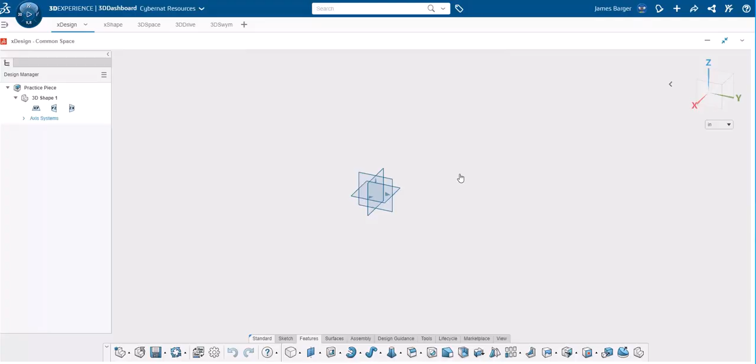So once I start xDesign, I want to go in and create a new design. Now I'm going to name it, let's just name it practice piece. And it's going to save it into my common space on the platform. All right, so now I'm in my new file, I want to do a top-down approach. So I'm going to click on Z-axis. I'm going to tell it to create a sketch. Now I'm ready to start designing.

So first thing I want to do is just go down to my sketch tools, and let's just draw a rectangle. Start at our origin. Draw any sized box. Now obviously I want to draw this so it's not going to take a lot of material, and it needs to fit on the table on my machine. So again, this is just for practice. So let's set our dimensions. Let's make it 12 inches long.

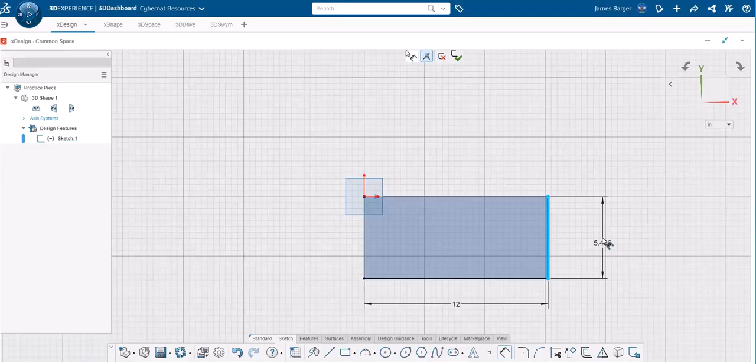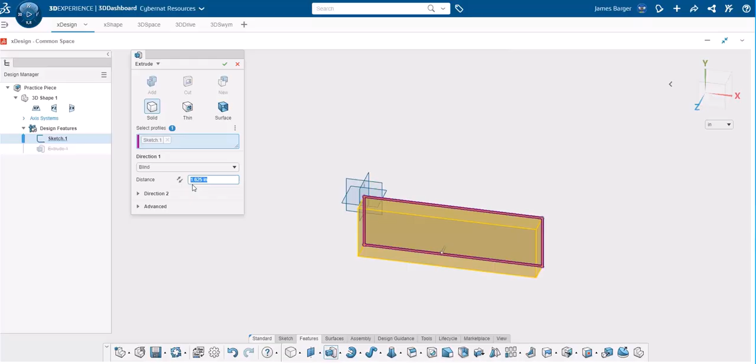And we're using a 2x4. So a 2x4 is not actually 2 inches by 4 inches. The 4 inches is actually 3 5/8. So let's set that width, and then let's go down to features. And let's extrude this. And just like 4 inches isn't 4 inches, 2 inches isn't 2 inches. It's 1 and 5/8 inches. So we'll set our depth on our extrude at 1.625. Extrude it, and there's our solid block.

Wow, we drew a 2x4 inside of xDesign. Isn't that amazing? And for this project, it'll work. But I just don't want it to cut a 2x4. I wanted to do some other things too to make sure that all my settings inside of my software on my CNC are correct and that the machine is cutting correctly and accurately.

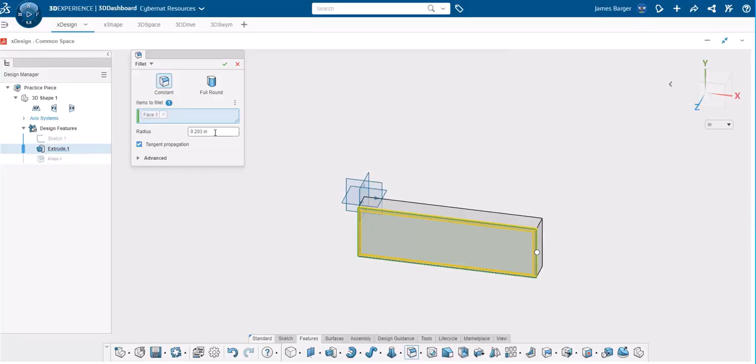So let's go down into features on the tools, and let's put a fillet on our piece of wood. And when we hit fillet, it pops up and asks us if we want it to be full round or constant. We're going to use constant. So let's select that face, because that's going to be our top face, and we'll set the fillet for 1/4 of an inch. Click OK. And as you can see, we now have a 1/4 inch fillet, but let's go a little further.

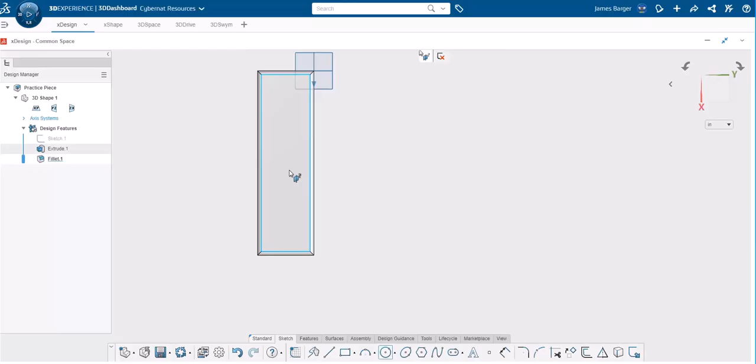On this, let's put some holes in the center just to see what we're doing here. So let's square everything up so we can see what we are doing. Go back to Sketch. Select the Circle tool. Tell it which plane we want, and let's just draw some circles. And now we need to extrude cut that circle. Let's see, we're dealing with 1 and 5/8 inch thick material. Let's extrude cut that hole. Let's not go all the way through, let's just go down 1 inch.

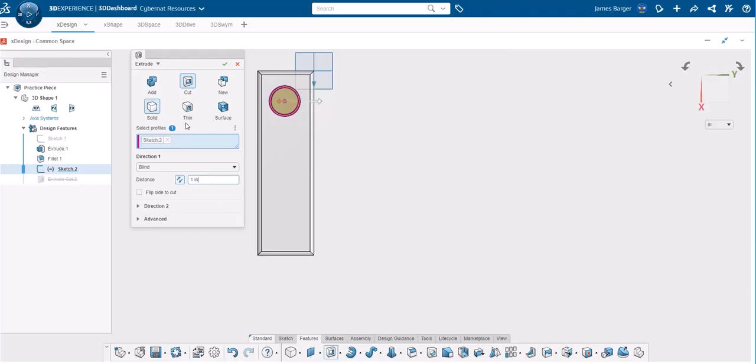Cut that. Now we've done a hole. It does not go all the way through. It only goes down 1 inch. That'll give us some test of our Z-axis on our CNC machine. After we're done cutting this, I can go in with my calipers and measure that. Make sure that the setting is correct.

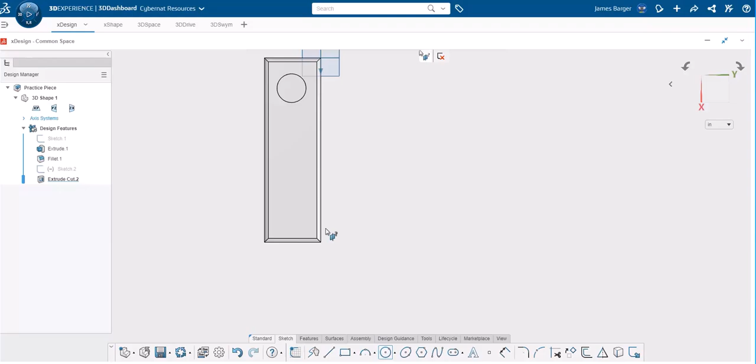So let's go again with another circle. Select my face. And let's do a hole this time offset from the center. And you can make these any size you want. And let's extrude cut that one. And let's go all the way through on that. So our thickness is 1.625, so we'll set it for 1.625.

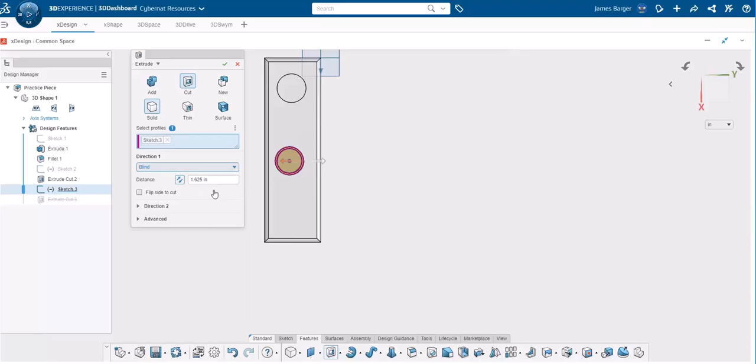You could also go up here and select through all, one way, both, geometry, next body, whichever one you want to use. But I'm just going to let it be a blind because I know that's what the thickness is.

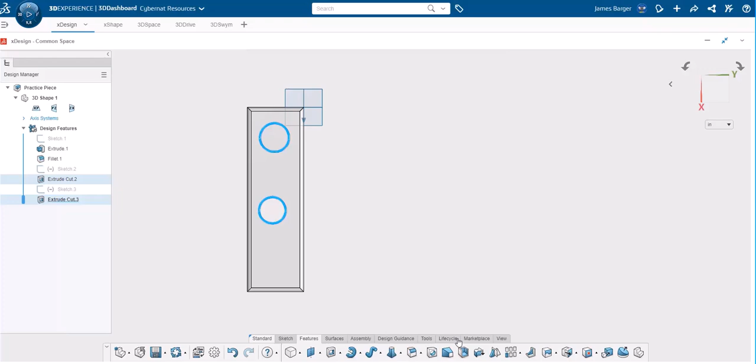Touch it through, and you can see now that that hole goes all the way through. But in addition to that, let's go back and also put a fillet onto the top plane of our circle. To do that, click on your circle, hold down the Control key, and click your other circle. That highlights both of them. Come down to your fillet tool. And notice how both those circles now have been selected in your items to fillet.

Again, we're going to set them 1/4 of an inch, constant. Click it, and there they are. So that's going to give us a basic piece to put on the CNC machine to test the accuracy of the calibration that was done on X, Y, and Z axis. So I'm going to save that. So let's come down here and tell it to export.

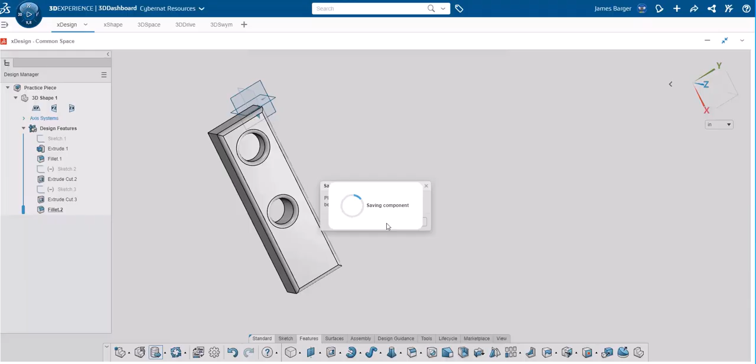Oh, I haven't saved it, so it's telling me to save it. Good thing to do is save it often, especially when you're dealing with software out on the internet, as any software. So where do I want to save it? I want to save it as a file on disk. You can change the name here if you want to. I'm going to leave it as practice piece.

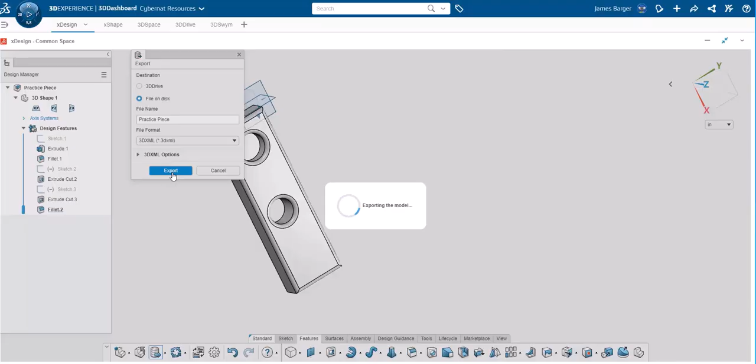In my file format, I always save my files in 3 different formats. I save it the first time in the standard 3D XML file, which is standard xDesign. I'm going to click export. It goes out there and does all the calculations, does all the math. It pops up, says, where do you want to save this? Well, I have a folder called CNC table that I've been saving my files to. So I'm going to save it there. Click save and boom, it's saved.

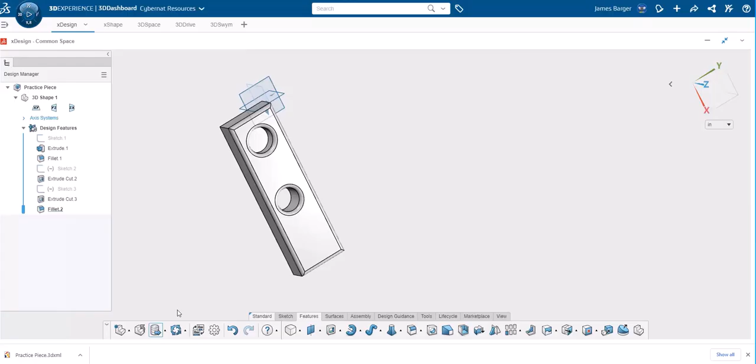Now I also want to save this. Click export again. When it comes up, I'm going to use the same name, file on disk, but I'm going to change my format to SLDXML. Do your choices. But SLDXML is a SolidWorks file, so that if for some reason my internet's down and I just gotta have this changed right now, I could pull up my version of SolidWorks that's on my hard drive and make the changes.

So I'm going to save it as a SolidWorks file. I'm going to put it in the same folder with the same name, different file types, so it's not going to overwrite the previous one. And then in order to pull this file up into my slicer software so I can convert it to G-code, I'm going to want to save this as an STL.

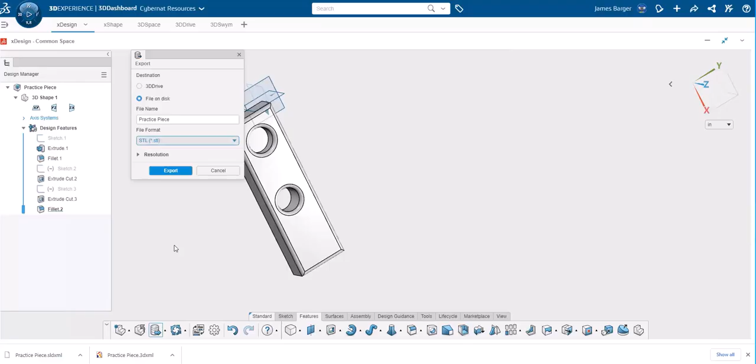Now some of you out there are saying, you can do that from SolidWorks. Yes, you can. But not every slicer software, either for 3D printer or for CNC, accepts every file out there. So why don't we save it into 3 different formats so that depending on what software I'm using, one of those 3 formats is going to work where I can pull it up.

So save as an STL file. I'm going to use the same name, this time as an STL, and boom, I have it saved as all 3. I've saved it as an xDesign file. I've saved it as a SolidWorks file, which of those are interchangeable, and as an STL file, which I can also pull up in either xDesign or some of these.

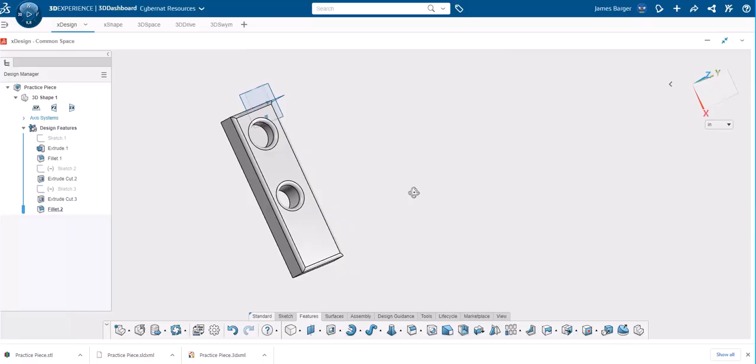All right, so that brings us to a closure of designing this small piece for CNC. And you could use the same piece for a 3D printer. You could enlarge it. You could make it smaller. If you wanted to do some scaling and practice using the scale function, both in xDesign, in SolidWorks, or in your slicer software, you can do that.

Again, I highly suggest that before you try to 3D print or CNC anything, especially when you've made changes to your machine, you always do a practice piece. It's always good, the more knowledge you can gain. And every machine has its own little nuances, whether it's a 3D printer, whether it's a CNC machine. And every software has its own nuances depending on what you're using for CAD design and or for your slicer software.